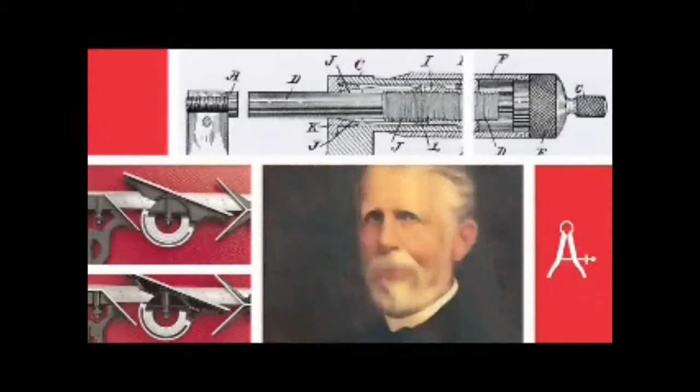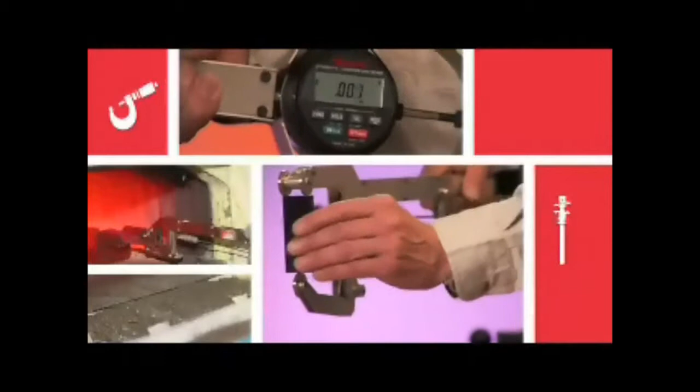The company was founded in 1880, 129 years ago, and we're very proud of our American heritage. Our reputation from Athol, Massachusetts, is known throughout the world. The founder, L.S. Starrett, was able to produce many tools that had broad applications, but he also recognized that many people had specific applications that needed to be solved on the shop floor. So it's in our DNA to solve problems.

We think our special gauge division and our special order division set us apart from our competition because we're going to provide specific solutions for our customer base that none of the competition can do.

You need a lot of experience to build gauges. If a part tolerance is 1/1000th, the gauge tolerance is 1/10,000th. Sometimes it's down in 20, 30 millionths of an inch. Over the past 50 years, we've done probably 25,000 gauges out there, and they're all unique.

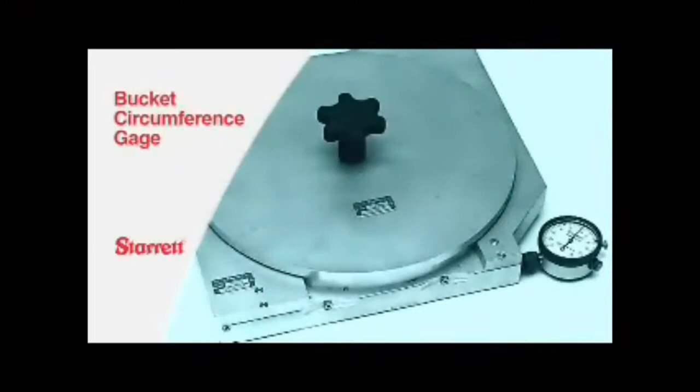There are very few industries that we don't touch. People ask the question of, what do we measure? And I tell them, just look around. A hamburger company calls and needs to know how thick a hamburger patty is, and the next minute it's somebody calling regarding ICBM missiles. Anything they can see around them, we've had calls on, and we've made gauges for them.

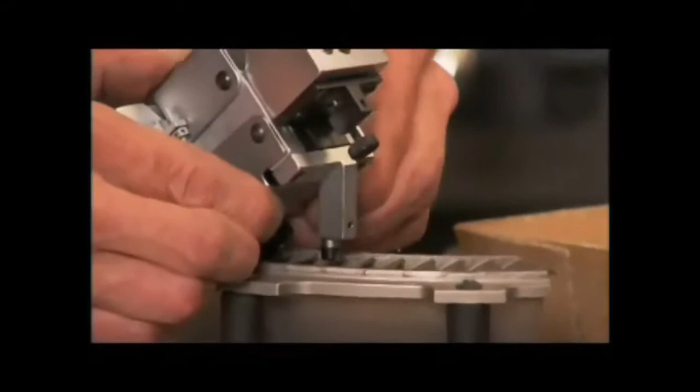Aerospace is number one. Airflow gauging, make sure that the engine is balanced. Medical, knee joints, there's a lot of different measurements that have to be taken there. Military, body armor, they have to be a certain shape to fit certain size people. Food containers, ice cream containers, coffee cups. You have to make sure that lid's going to stay on with hot coffee. We really are touching anything and everything in the manufacturing world.

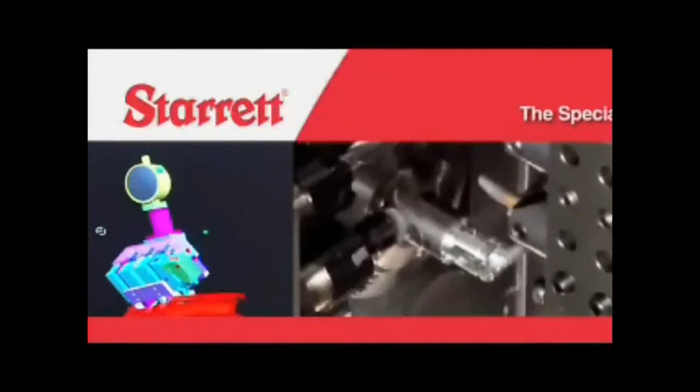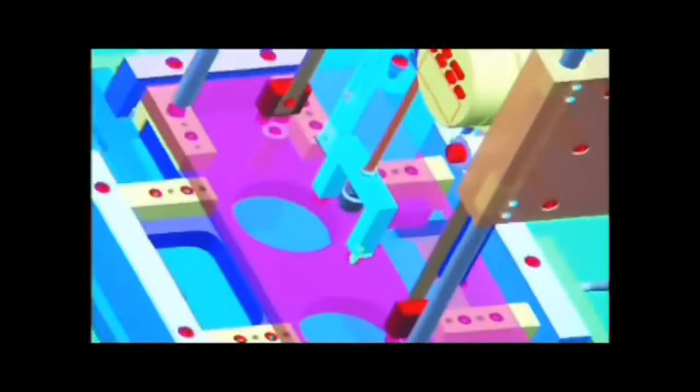Today, with computers, the internet, we're able to touch so many more people through technology that we're really able to turn design gauges around quicker. We can get a much more accurate feel for what is needed in a much faster time frame.

It's usually like a quality engineer at the companies that will call. They know Starrett. They've got plenty of Starrett tools in their facilities. They like them, so they call us. The first thing they want to know is, do you do special gauging? And we say yes. We come up with custom solutions all the time.

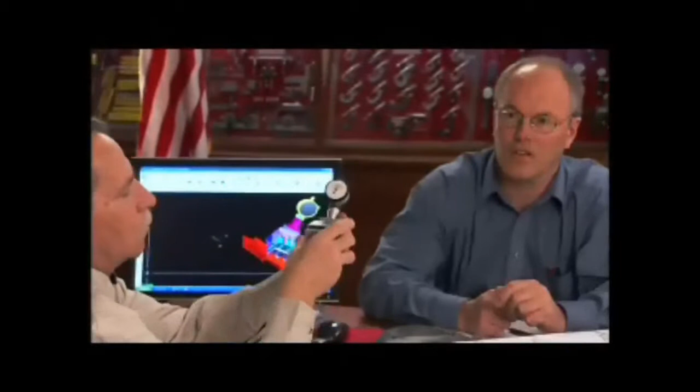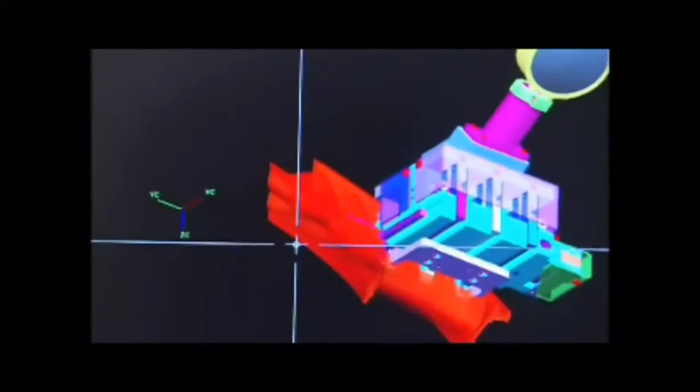Our people understand it's important to make sure that all the design features and what they're trying to accomplish is clearly understood on both sides of the table. We won't provide a quote until we're sure that we thoroughly understand the best way to solve the problem for the customer. So it's a lot of back and forth, phone calls, sending sketches back and forth, CAD files that we can actually interrogate quickly, design around. Are we on the right track in the design process?

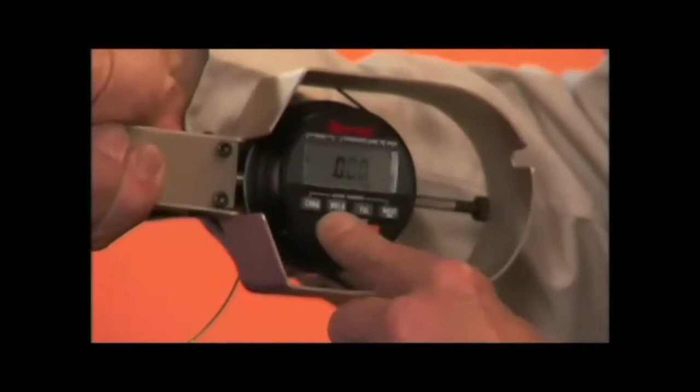A lot of our gauges nowadays, people want to have access to the data and not use cables, so we have that ability in a lot of our gauges. And a lot of time it's a trip to the customer to actually see the application. There's nothing better than face-to-face communication to tie down all the little idiosyncrasies that go into these gauges.

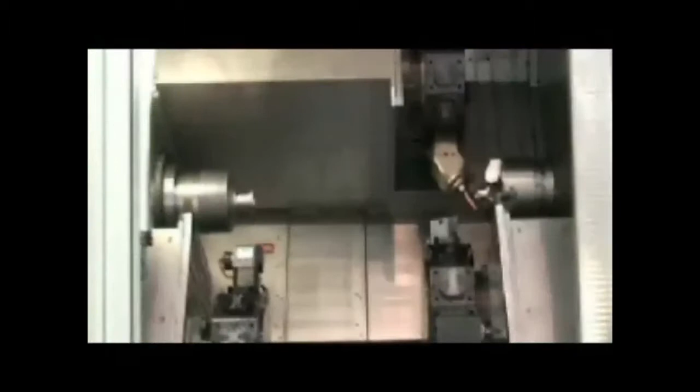Pricing is a fixed price right up front, and we usually abide by it. Sometimes we run a little over, but we don't pass it on to the customer. And before we will build anything, the customer has final approval.

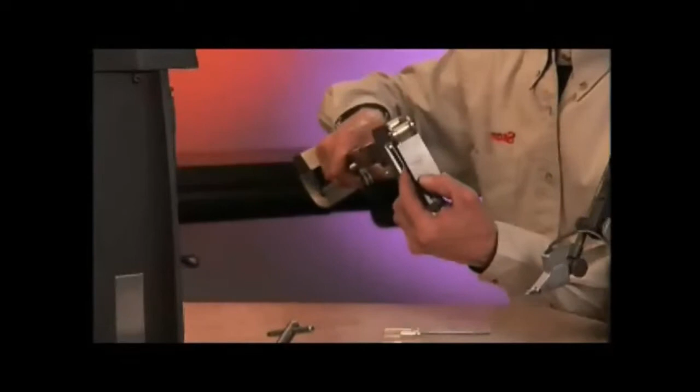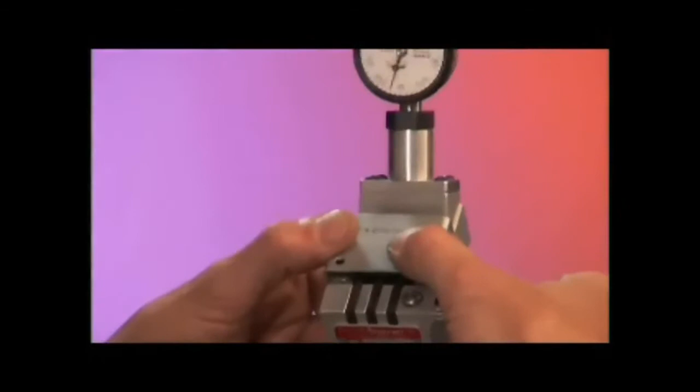Once it's built, it will go through inspection. Most of our gauges have masters, and they duplicate the part just precisely. And for certain applications, then we fly back and instruct the customer on exactly how to use the gauge properly, and provide documentation that if somebody walked in and didn't know how to use the gauge, they would know how by just reading the documentation.

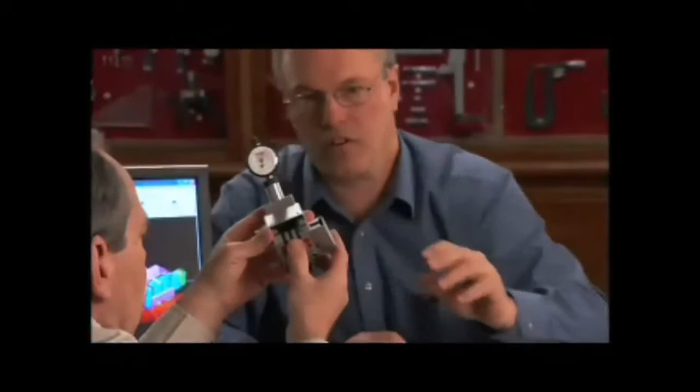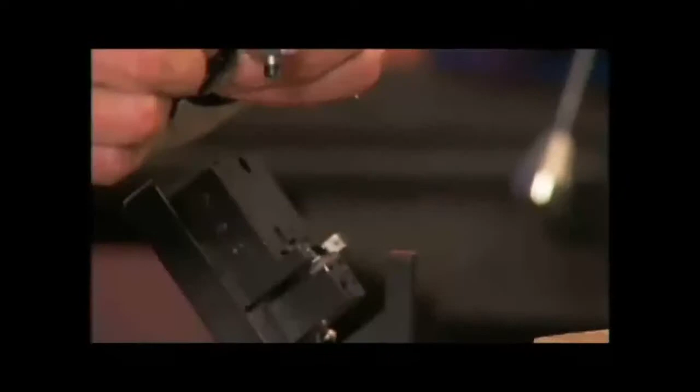So the rewarding part of special gauging, L.S. Starrett would have been very proud that we had taken his philosophy, go into customers, talk engineer to engineer, to understand the problems that they're having, and to come back, put pen to paper, be able to have a continual dialogue in coming to them with the best solution that we can provide at the best possible price. And that's the crux of what we try to do here every day.